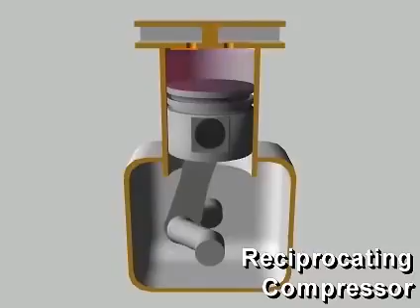A reciprocating compressor compresses refrigerant vapor in a cylinder using a piston. In a way, reciprocating compressors are like automobile engines. The pistons are directly driven through a wrist pin and connecting rod from a crankshaft. Depending on their size, reciprocating compressors may have one or more cylinders. Multiple cylinders may be arranged in line, opposed, or in a V.

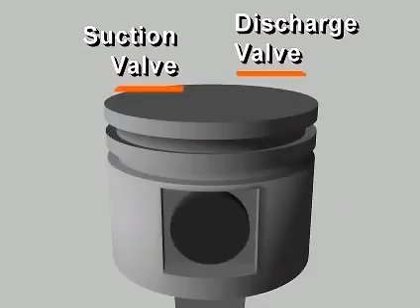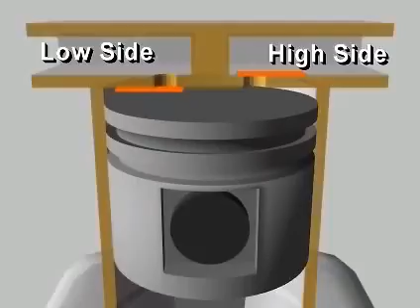In each cylinder, reciprocating compressors have both a suction valve and a discharge valve. These valves give the compressor its ability to pump refrigerant vapor against a pressure difference. They are usually located in the head of the cylinder, in passages connected to the high or low pressure side of the system. Let's follow the compression process in a single-cylinder reciprocating compressor during one complete revolution of the crankshaft.

Starting with the piston at the top of its stroke, or at top dead center, the piston begins to move downward as the crankshaft rotates. Because both valves are closed, the downward moving piston reduces the pressure in the cylinder. As the pressure in the cylinder falls below the low side pressure in the suction line, the pressure difference opens the suction valve, letting refrigerant vapor flow into the cylinder.

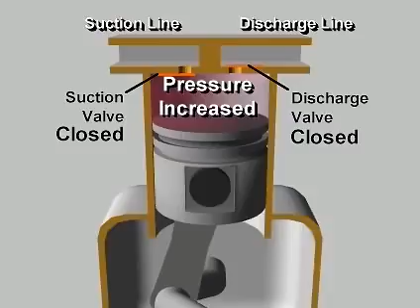The piston continues down and pulls in more vapor until the cylinder is filled with low-pressure vapor at the bottom of its stroke. Once past bottom dead center, the piston begins its upward stroke. The suction valve closes. As the piston moves up, it reduces the volume of the space in the cylinder, increasing the pressure of the vapor. When the pressure in the cylinder exceeds the high side pressure in the discharge line, the pressure difference pushes the discharge valve open, letting the compressed vapor flow out of the cylinder.

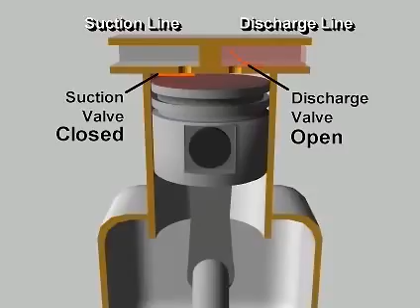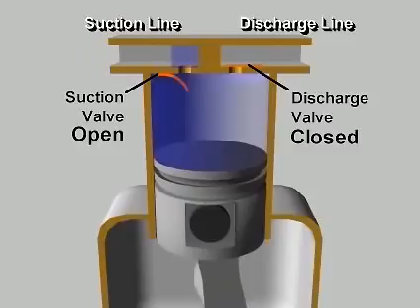This continues until the piston reaches the top of its stroke and most of the compressed vapor has been expelled into the discharge line. When the piston begins its downward stroke, the discharge valve closes. The complete cycle then repeats during each revolution of the crankshaft. This is the mechanical positive displacement vapor compression cycle using a reciprocating compressor.